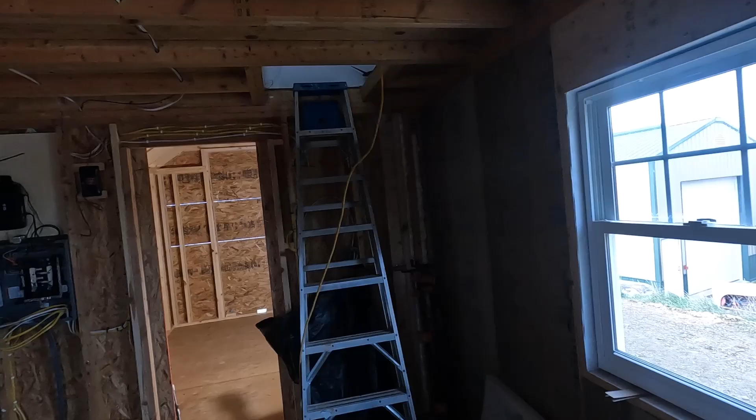The addition is completely framed in and skinned. Now it's time to get that dried in. Looking really nice, but a lot of work still left to do.

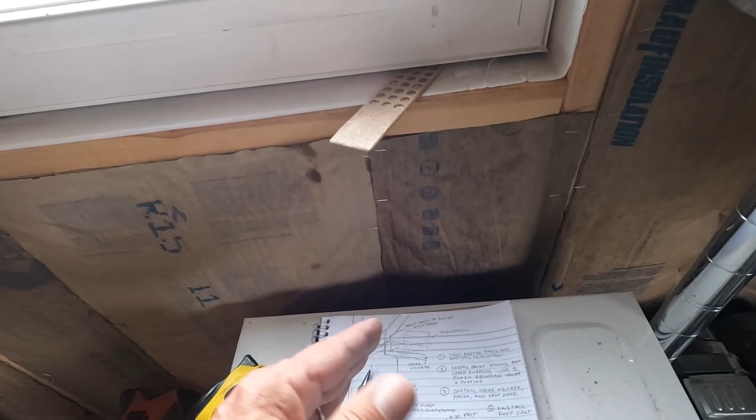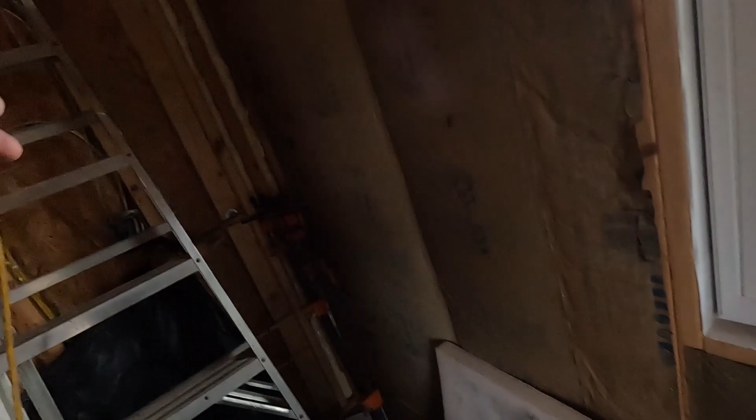I have a list, and I'm sure this is not all inclusive, but I'm trying to get everything figured out, what has to be done before what, because it's real important where the one roof meets the side of the old building, right in here somewhere.

So the first thing on here is to trim the rafter tails and install the insulation. That's cutting off the bottom of the rafter tails so they're flat, and then I'll be putting in this 2x4 all the way across, and then a fascia board on there at some point.

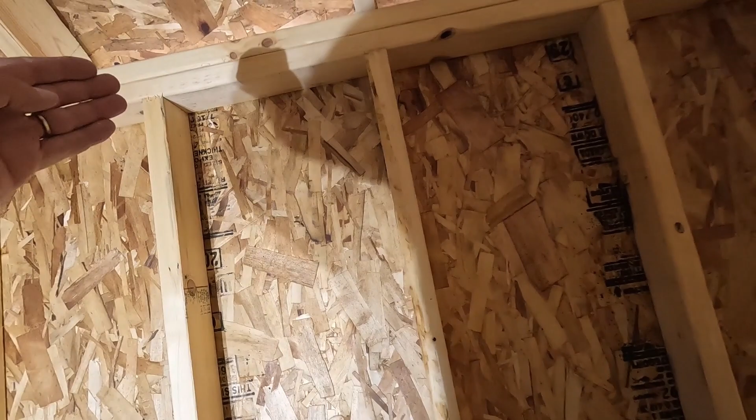But before that fascia board is put on, I'll be putting on insulation. I could show you that real quick. That'll just be a piece of insulation on the outside that goes from right in here somewhere up to the roof, and that'll seal up that opening.

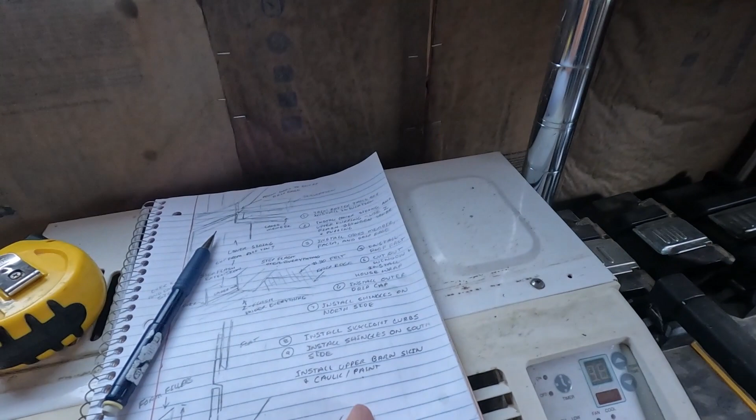This is not going to be vented. It's going to be completely sealed up, and it's going to have rock wool insulation in it. More about that later, but that's the reason for that. That's going to go like from here up.

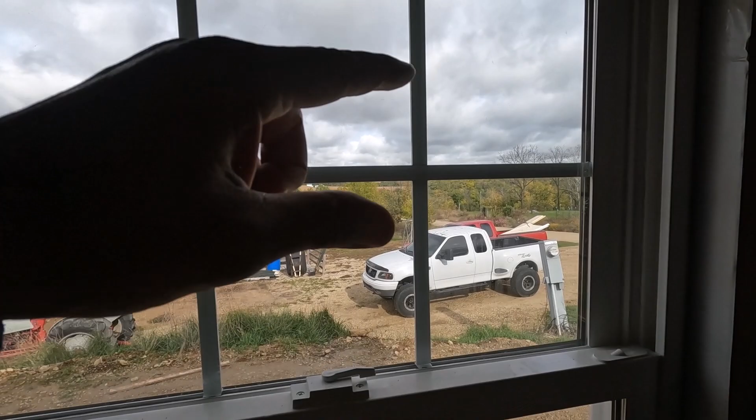So what else do we have on there? Oh, we have some special moldings that I had made up by the Amish. They're over there in the truck. And I have some furring material, which is 3/8 inch exterior plywood that needs to go on the upper section of the barn right here so that I can put the siding on that.

But before the siding goes on that, the roofing has to go on. So it's a real detailed bunch of stuff that has to be done, and it all has to be done in order. So we got our drip edge, and then on top of the drip edge goes the felt, and then on top of the felt goes the shingles and the step flashing.

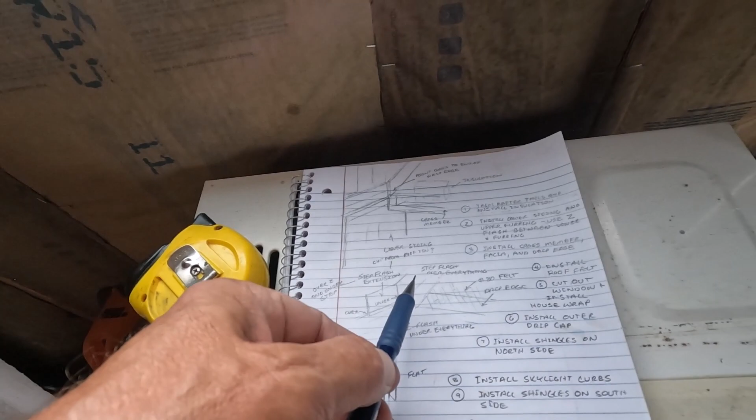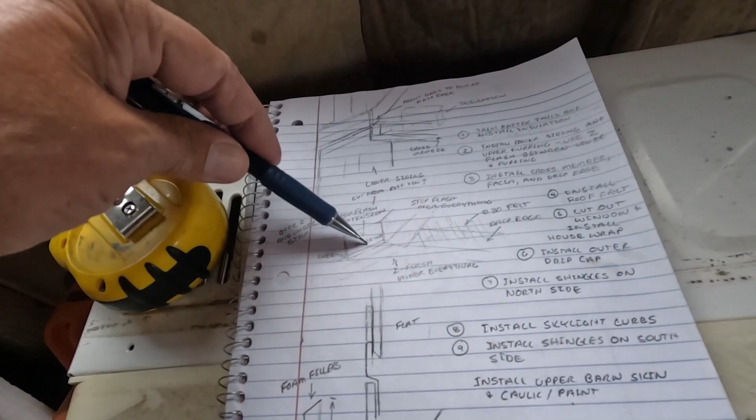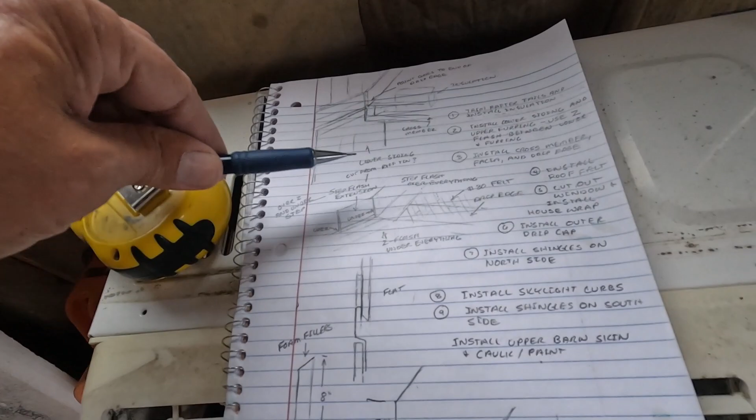And on the other side, it has step flashing along the building and around each one of the skylights. At the bottom of the step flashing, it has flashing going behind the step flashing, and it has a Z flashing that goes on top of the siding on the lower part of the barn.

Like I said, real complicated, and it's going to be kind of hard to film on this side of the building because of the wind. The wind's coming from the north, but I can film while I'm working on this side of the building. No wind over there at all, so we'll try to get as much as possible filmed.

But before I can even start on that, I need to lay out where the electric trench goes and mark how deep it needs to be along the way. Right at the pedestal, it doesn't need to have any depth at all. That whole area is going to be raised up by about 2 feet next year, and we don't want our electric line buried 4 feet in the ground.

So I got to lay that out. My daughter and her boyfriend are going to be digging that. And when I finished this up, it was getting dark, and then it started raining. So I still have all of my stuff in the gator, and I still have a truckload of stuff from running to town yesterday. All of that has to come out.

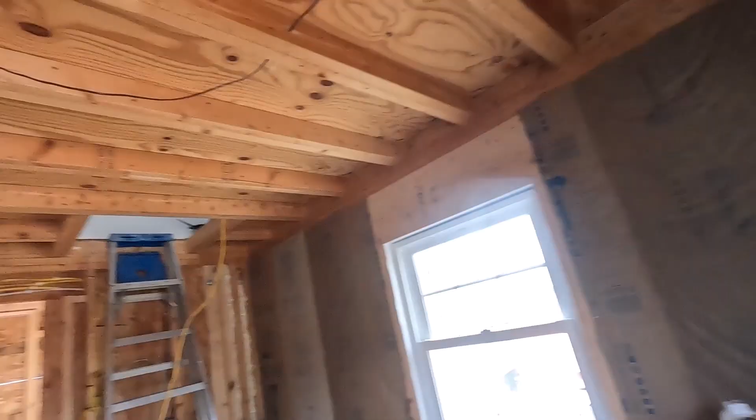So we'll see how much we can get filmed. I don't know if it's going to be that much, but I'm going to spread this out. This is day 1, and I'm guessing it's going to take 6 or 7 days to get this completely dried in. So let's get going. I'm going to mark that trench for them right away, and then we'll move over to the gator. I'll show you what we're dealing with over there. And with any luck, we'll be cutting rafter tails by noon, maybe.

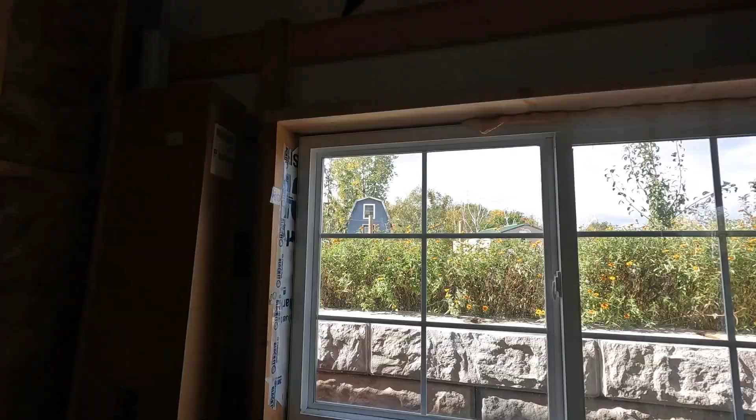Okay, I got done laying out that trench, and I'm going to try to show it to you later if this wind dies down at all, but it's like 20-mile-an-hour wind sustained out there, so I have my doubts.

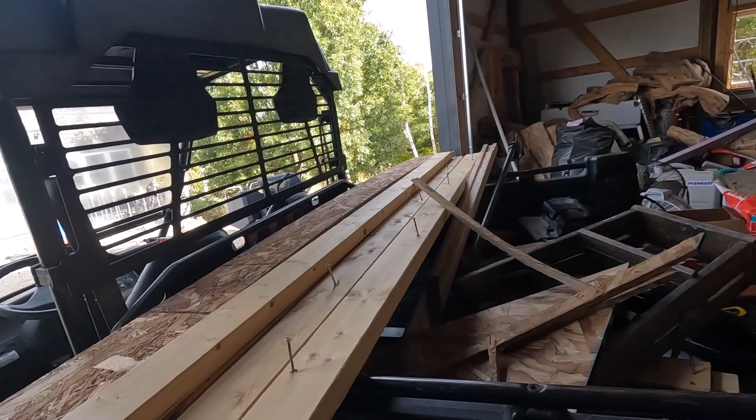All right, this is everything that was outside when I finished up sheathing the little tiny house up there, and now it needs to go wherever it needs to go.

Some of it's going here, some in the scrap pile, and some back up by the tiny house. I just threw everything in here and backed this in because it was about to start raining, and it was almost dark. That was four days ago.

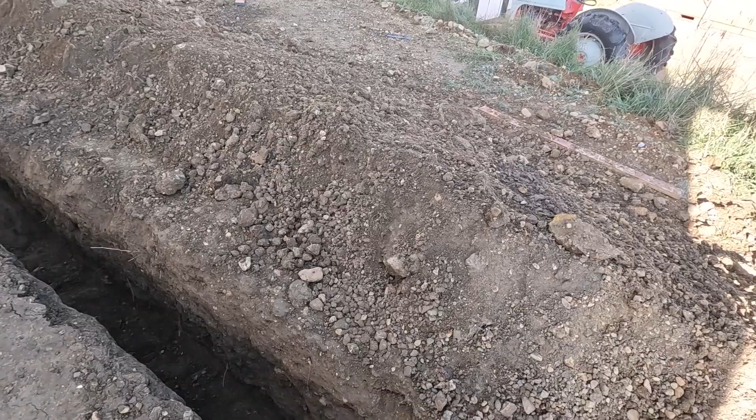Man, does that suck having a trench here again. This was all dug by hand. We really don't want a machine out here doing this, because that would just make a huge mess, a huge wide trench. But we're ready to go on this.

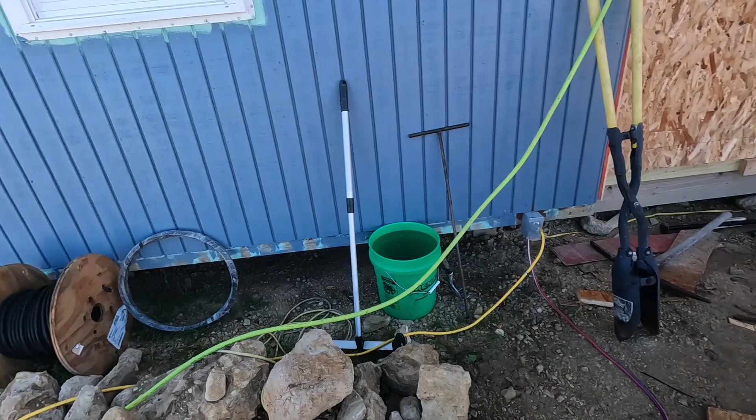We're going to be cutting and installing that wire right there and that wire right there in a day or two. But this is the focus right now.

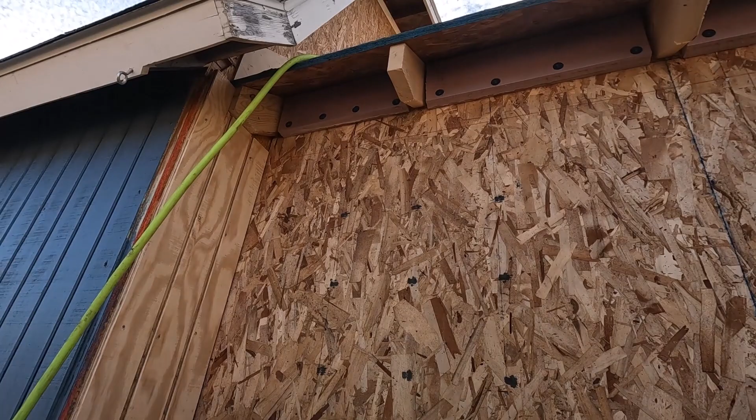The day I started this video, I got these rafter tails all cut. They had a cut going this way. Oh wait, no, I did that before. I just did the cut going that way.

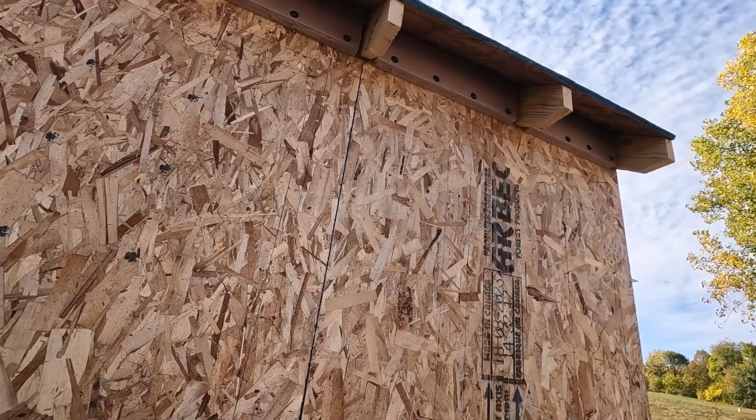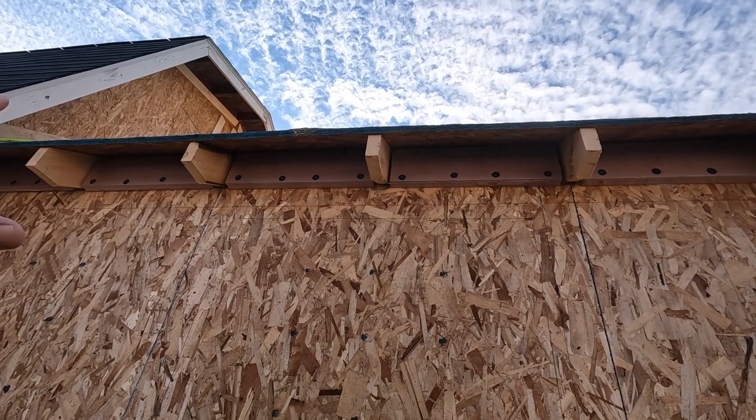Then I got all of this foam cut and nailed into place, and I was doing that while he was digging the trench here, so it was kind of a pain in the butt. It was cloudy and extremely windy that day, so I really couldn't film anything. This took that entire day, getting those rafter tails cut and getting that foam in.

Today I'm going to foam with spray foam around the edges. That's going to take a while too, because I have to move the ladder for each one. But I also need to finish that up.

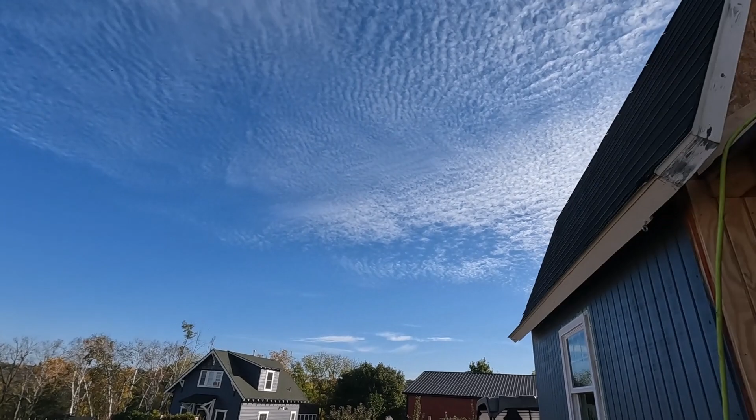I did this yesterday, and that's the furring strip. The siding is this T111. I need to template that as well today.

What I'm going to do is finish up this furring. That's going to hold the siding three-eighths of an inch away from the building so that we get proper drainage when it gets down to here. This will all kind of make sense once I get further into it and show you.

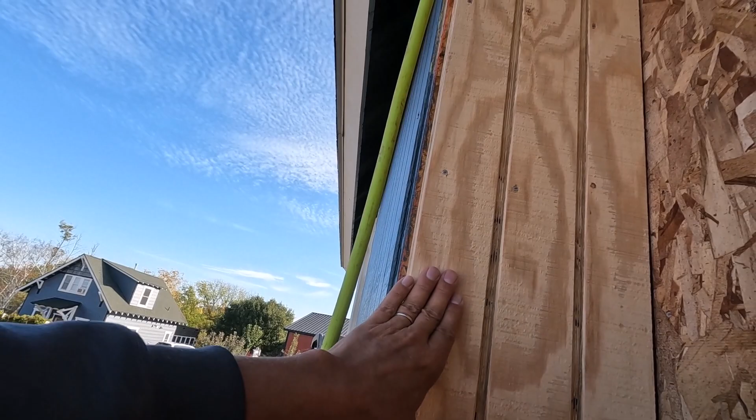There's going to be step flashing in there, another flashing that goes this way, and then a drip edge that goes this way, so water coming down the roof isn't going to go directly onto this. It's going to go onto a metal Z flashing. I got the one on the other side in, and this is the one for this side.

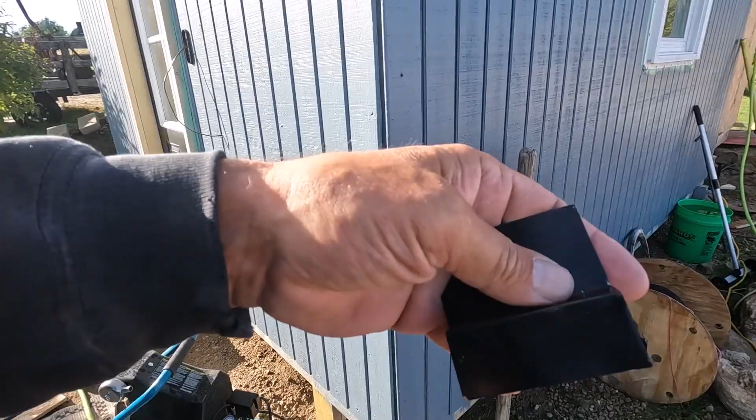So, well, it's kind of hard to explain. I'll show you that in more detail when we get to it.

Again, I don't know how much I'm going to be able to film, because it's really hard to film up there. It's hard to even be up there. But the task for right now is to get the rest of this furring in place.

Then I need to make cardboard templates of the panels for each side, which is going to take a while. I've got to cut it, tape it together, a lot of messing around, and then pull those off and bring them over to the wood shop, and we'll get that stuff cut later. Once I have those templates, I can move on to the rest of the stuff.

Let me see what I got here. I have to finish the furring, foam these, and install the cross members.

The cross members will go on the bottom of this cut here. It's a 2x4 that goes all the way across. That stiffens everything up and gives me a place to put the fascia board.

Fascia board goes on next, and there's a piece that goes onto this chalk line here that'll create the surface, or the two ends of a surface, where I'm going to put tin that goes across that, and that'll be the soffit.

So those couple things, well, especially that templating, I may only get as far as getting this furring done and getting the templates made. This stuff really doesn't need to be done right away. If I can get that upper part done, I can get some roofing felt on this. If that sounds ambitious, it really is. I don't know if I'll be able to get this stuff done today.

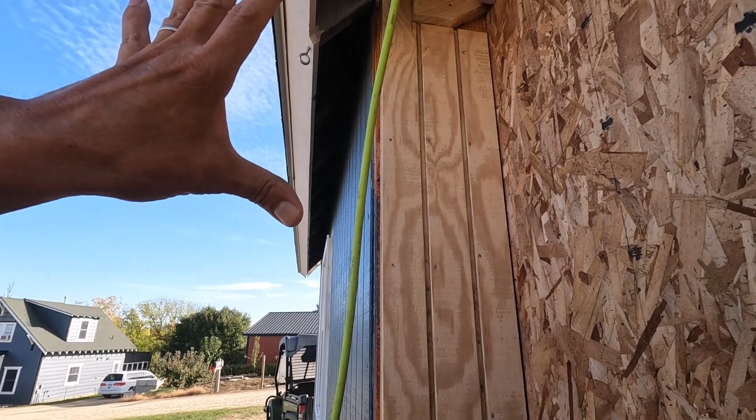Yeah, this took an entire day. The other side took about 4 hours, and the majority of the time was spent trying to figure out all the different angles and stuff. I cut a bunch of little pieces of the different materials.

I had a piece of drip edge. Where is that? Oh, it's on the other side. But I slid the drip edge down and figured out all the different angles and where stuff is going to drip. Once I got that all figured out, I cut this piece for the other side and got that in.

And then this one took about an hour. It has a beveled bottom and it's treated with a wood preservative. There were just a lot of different things that had to be done with it, but now it's done and it's going to really shed water nice. So it's better to have things nice and waterproof than rush through a job.

Okay, I'm going to get started up there. I'm going to film some of it and then I'll show you what it looks like when it's done.

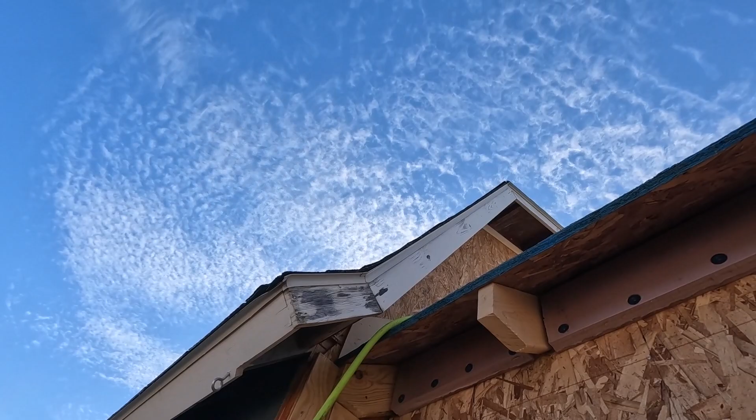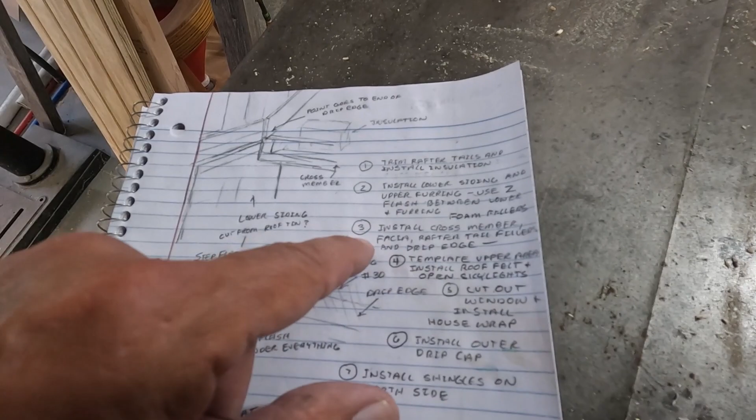Let me quick show you where we're at on the notes. These were not supposed to be days, they were just steps to get this done, but it turned out to be days. The trimming of the rafter took a full day. This took a full day. And now we're on to number 3, on the 3rd day. And this is going to take at least a full day. I have the templating in there as well, so maybe we're going to get ahead of it.

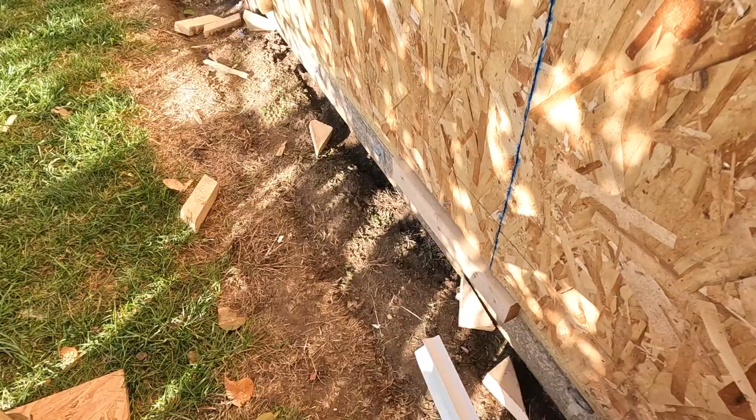Here's that drip edge sample I was talking about. Yeah, the ladder's too far away, but we have our Z flashing on this side. I'll show you that up close a little bit later, probably in the next video.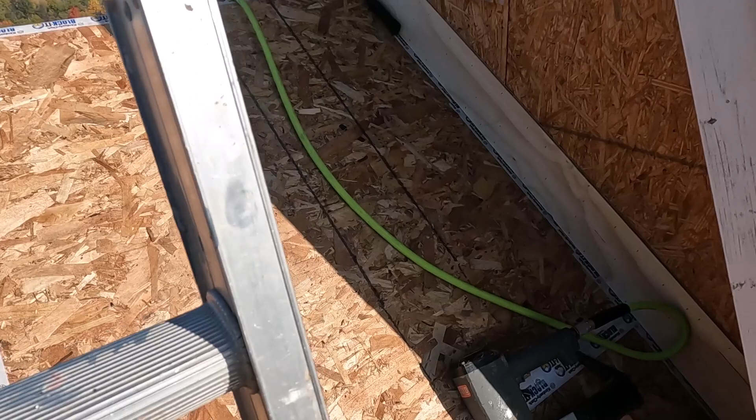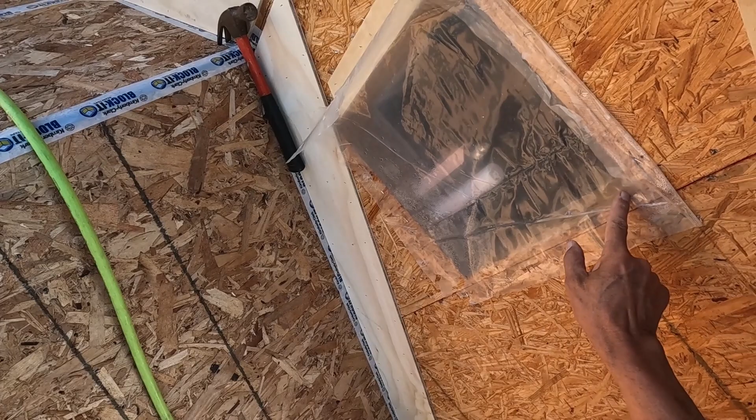All right, I just got my nailer and my jigsaw up here. So what I got to do first, I have my furring laying down there. I need to measure and rough cut a piece to fit here and then mark where the window's going to go, get that notched out, and then staple that in place. Then I'll put one across here and across there, and then we have one more over here and one along that edge, and then we can finish up that side. I think I'll actually do those edges first because they're longer.

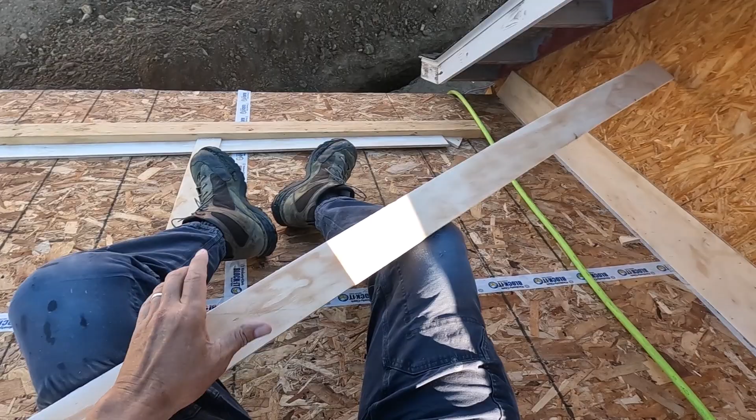This side of the roof is soaking wet from the dew, so it's really slippery. These just need to be rough cut. They're going to be completely covered.

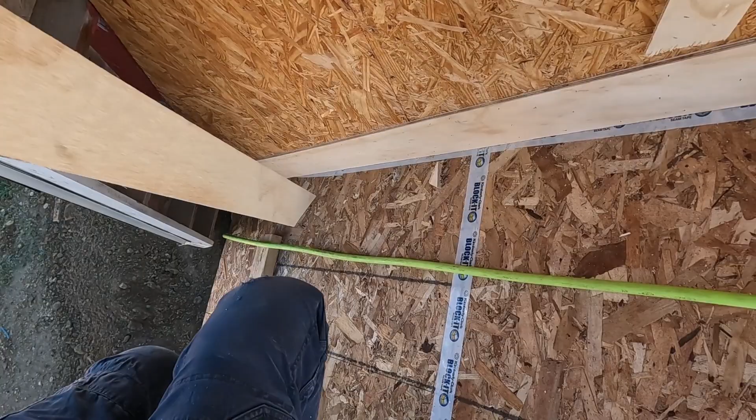Well, that was pretty good. Fits perfect the first time. And then this is just getting stapled in.

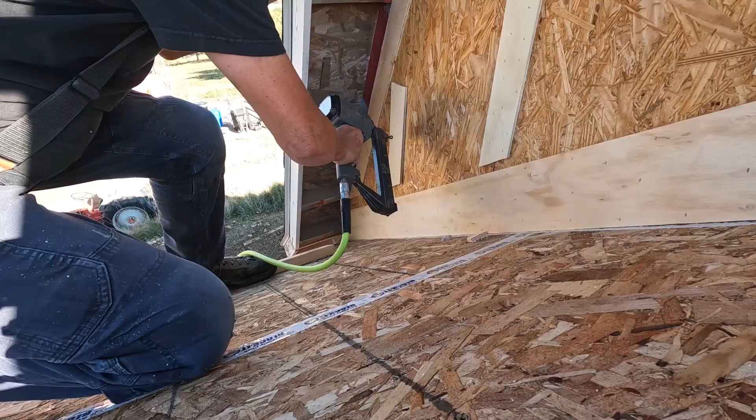What a beautiful view. Beautiful fall day. This is the first day in a good while that it hasn't been windy as all get out.

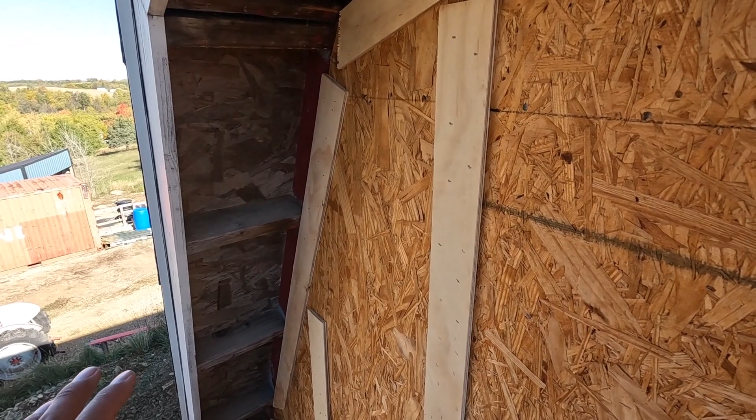Okay, now I need to go get a bunch of strips of cardboard and stuff and make a template for each side of this. I'm going to put a center line right down here based on this right here, and then I'll have to figure out the overlap, and we'll get templates made for both sides of this. Once that's done, I can concentrate on the rest of the roof, specifically the fascia, so that I can get the drip edge on. And once I have the fascia and the drip edge on, I can get the felt on here.

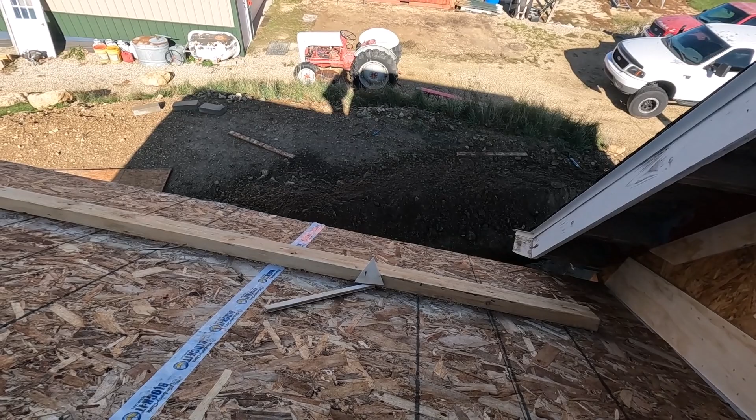That's going to run up just a bit onto this. There's going to be step flashing on that later. But before that, I have house wrap to put on here. Lots of work to do. I have the rest of today and tomorrow, and then it's going to rain again the day after that. Hopefully I can get this done by then. All right, let's start making those templates.

All right, I have a good deal of my templating done. What I did was just take a large piece and get it right in the center, put a couple staples in it, stapling it right to the furring strips here. Then I used about 6-inch wide strips and this bigger piece right here to fill in the rest.

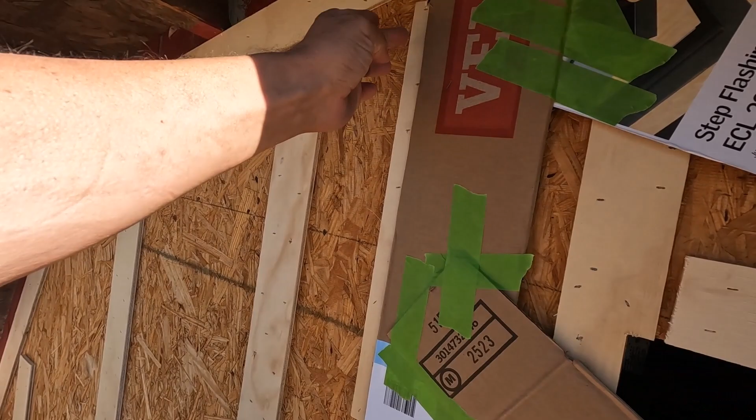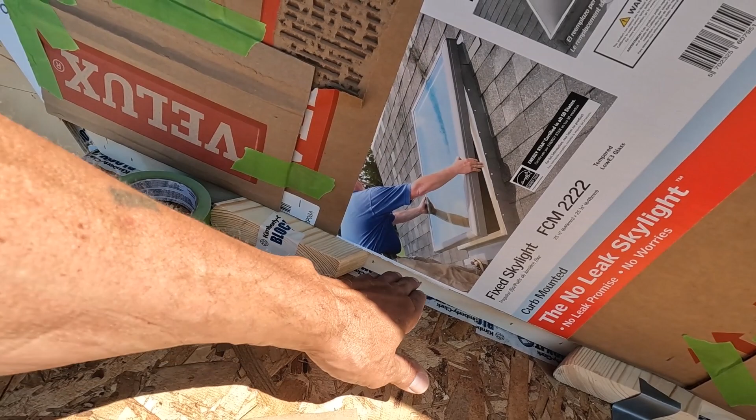This is my edge right here, and I have these 2x4 spacers at the bottom. I want 1.5 inches of space between the bottom of the panel and the roof. That's going to get filled in with a little bit of stuff, the roofing, the felt, and the step flashing. So it'll probably end up to be like 1.25 inches, which is fine.

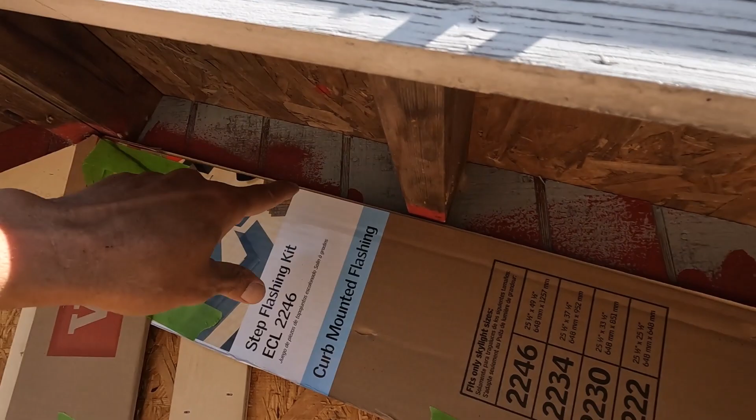So I have almost all of this upper part done. I got about 1/4 inch of gap here and there, 1.5 inches at the bottom, and I'm going to fill in this opening right here. I don't need to, but I want to do that so that this whole thing doesn't fall apart when I take it off.

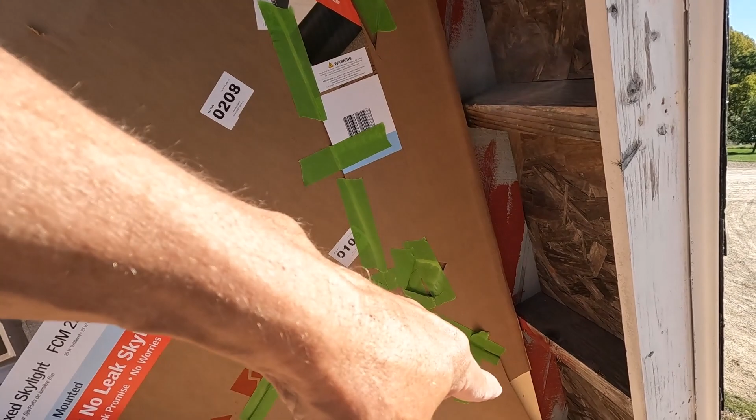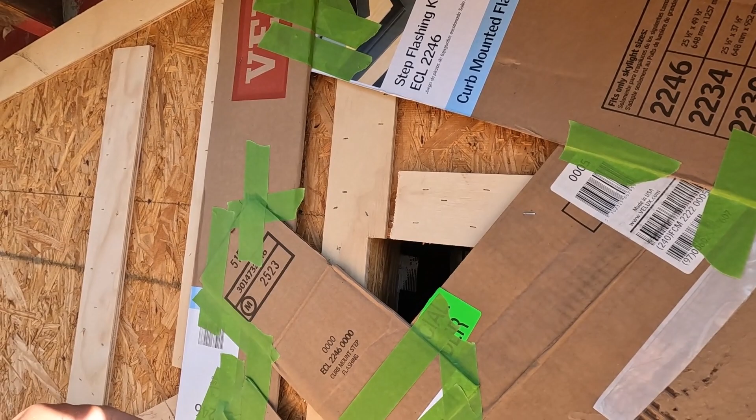We got a couple staples holding this on, as few as possible. Got one there, and there's one buried under here. Once I get that lower part done, I have to peel this off, and it has to come off intact. So I'm going to get a piece in here, put a bunch of tape on that, and all that's going to do is hold this thing together when I take it off. I could take it off exactly like it is if I could get it off, and it would be fine. I don't need anything in here, but I'm just going to add it for extra strength.

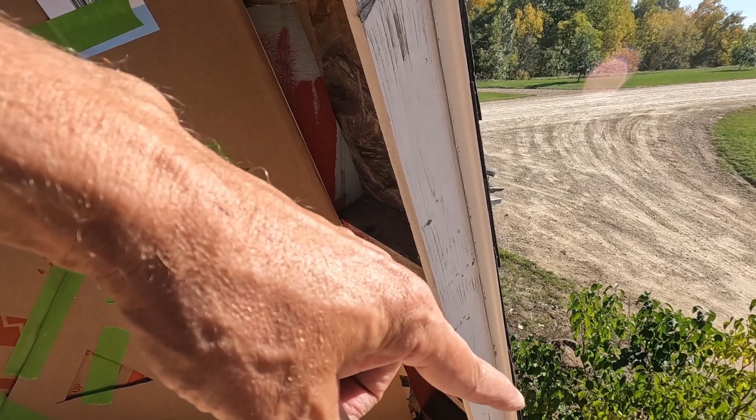Once this is done, I'm going to get down on top of a step ladder and piece together all this stuff. That's probably going to be 3-4 pieces. Then I'll come back up here and pull this off, and I'll start the next piece, which goes to about right here. I got the lines drawn on here.

As you can see, I believe you can see that. That represents the overlap of the panels. All right, yeah, this is taking a while, like I thought. So I'm going to get moving on this, and I'll get back with you when I start tearing this off.

Okay, we have the north template done. Let me show you this lower part here. This is exactly how it's going to be cut.

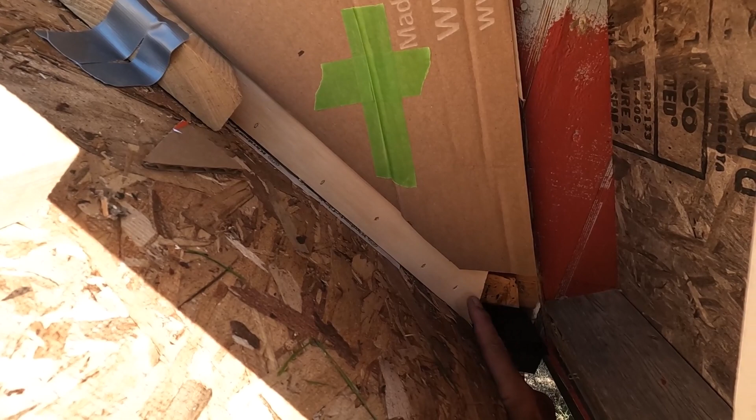There's actually another piece of this furring that goes in here, and then when the roofing goes on, we'll have a drip edge come out to about here, but there's step flashing that will come way back to here, and that'll be under the final siding. So this will all be black right here, and this will be the same blue as the rest of the building.

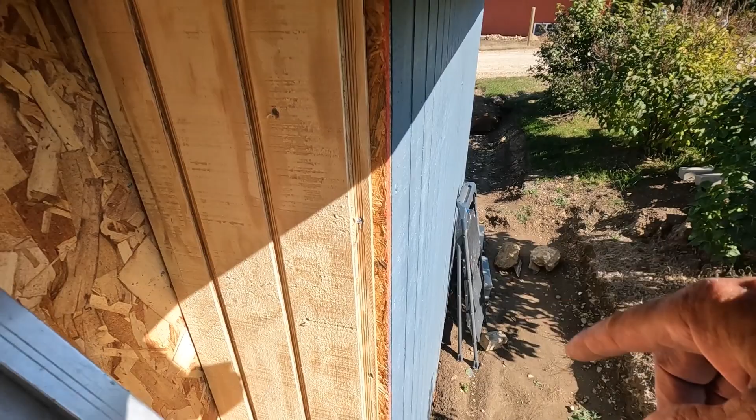Now I got to get this off without destroying it, which shouldn't be too hard. I probably have 5 staples in there. Got one right here. Yeah, there's only 3 on the bottom, 5 or 6.

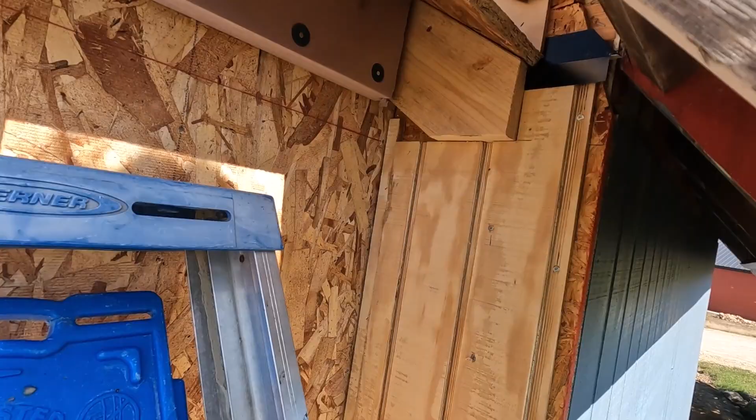But before I do that, now that I got some heat on this, I'm gonna go around and get this foamed in right away. Now that I got the ladder out of here, I have to move the ladder and go down the line, get that all foamed, and I'll do the same thing on the other side once that warms up.

Not sure if you'll be able to see that or not, but I got everything all foamed up. Now it's time to take the template off. Hopefully this thing comes off easy. That will make my day a whole lot easier. Oh, so far so good. Yes, yes, yes.

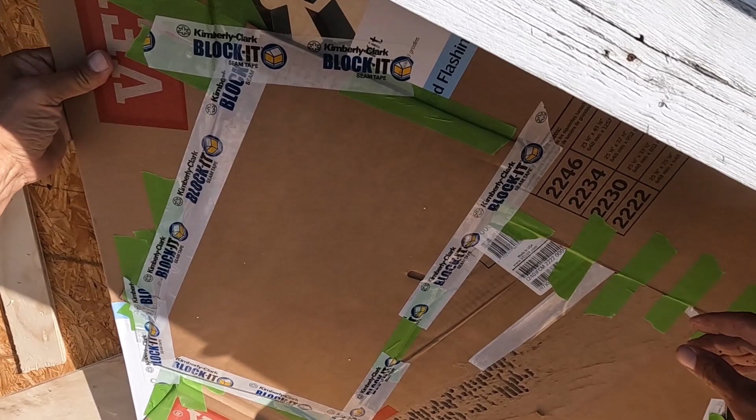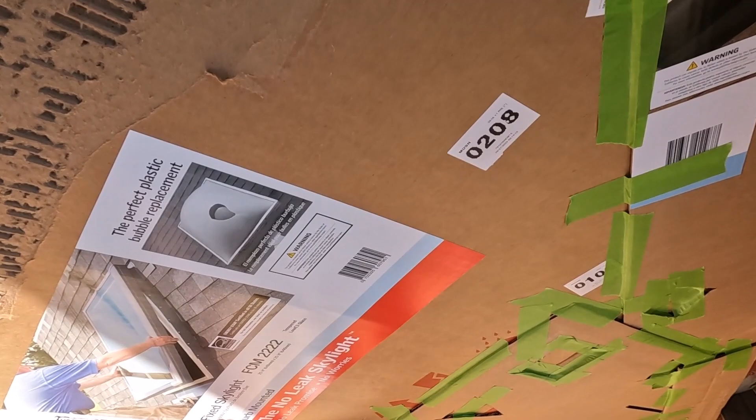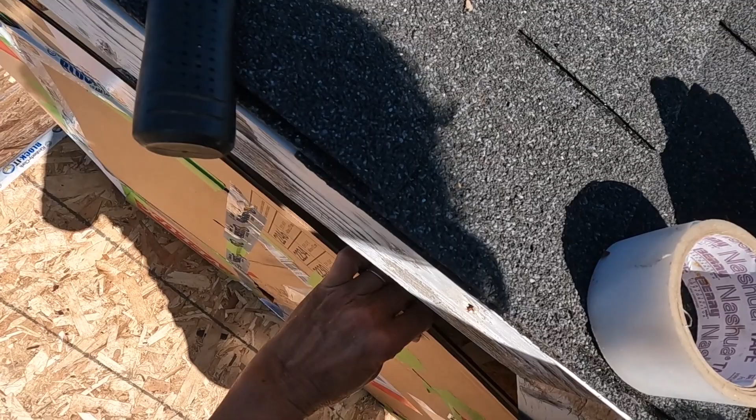Don't want it to bend up much, and I definitely don't want it to come apart. Come on. There it is. Okay. Now, to get this down, I can't just drop it. Beautiful.

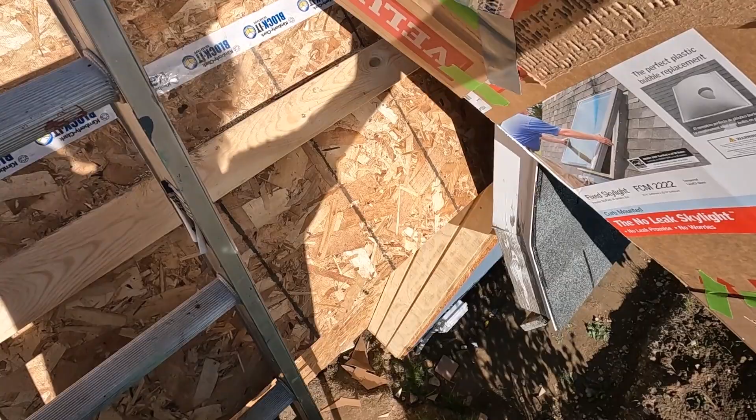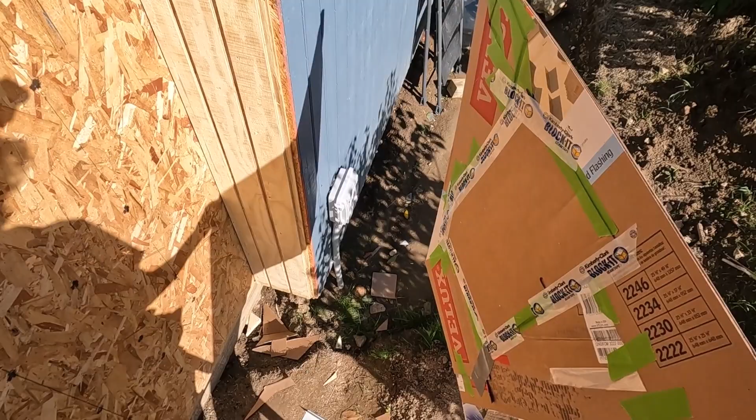A hornet attack, several hornets attacking me. Sons of bitches.

Okay, I moved everything over to this side. Yeah, I don't know how far I'm going to be able to get today. It's already 1 o'clock and I have one side of the template done. Well, all of this foaming as well.

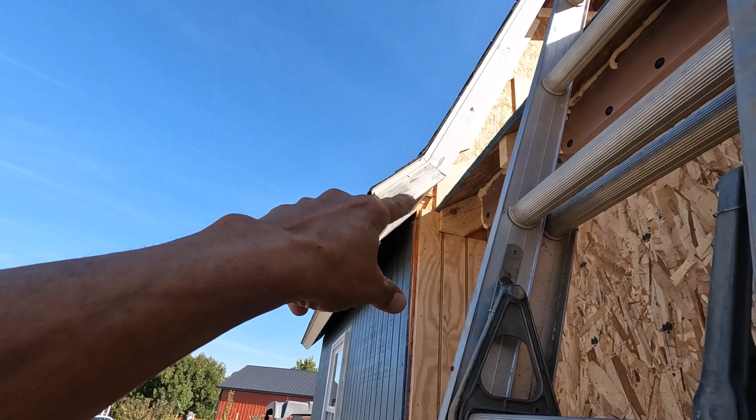But that template is far more important. Hopefully I can get this other side completely done by the end of today. And with any luck, get these filler pieces in the corners and that trim. And I'm sure that's going to be it. Either tonight or tomorrow night, I have to run to town. I have some scaffolding that screws onto the wall so I can put the roof on from up high. I usually do it from a ladder, but that just takes way too long.

With any luck, I should be able to get what I said done today, but I'm definitely not going to be able to get these filler pieces and the fascia on today, which has to be done before the drip edge goes on. Once the drip edge and the felt goes on, I have to get the house wrap on before the other drip edge can go on.

Then I can put the roof on. Looks like this is going to get rained on again, but I think it's just going to be a brief little rain - not tomorrow morning, but the morning after that, which really sucks. All right, I'll get back with you once I have this part templated.

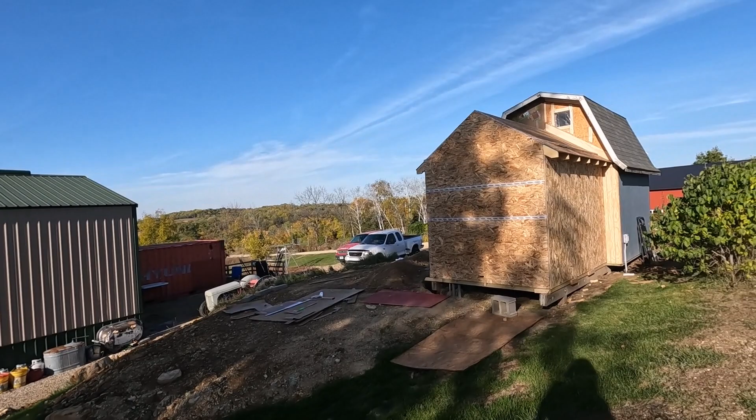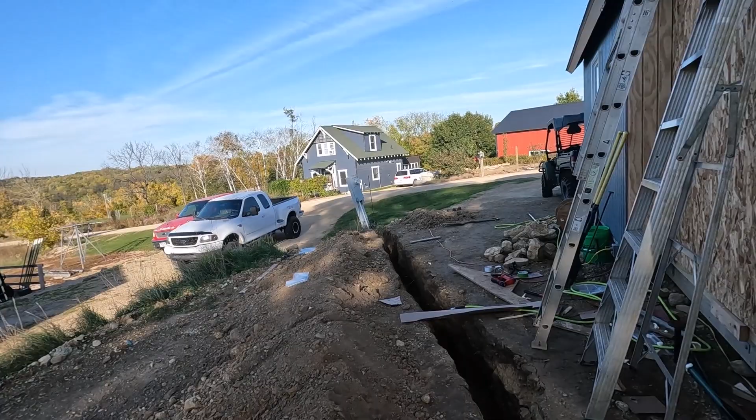All right, my other template is done. We just got invaded by Asian beetles, and my wife sprayed the house. I sprayed up here and some of the doors. But there's just thousands of beetles around. A lot of these are dead now, but you get more landing all the time. Not sure if you'll be able to see them. There was hundreds on here before, and then I sprayed this - they all dropped down to the ground.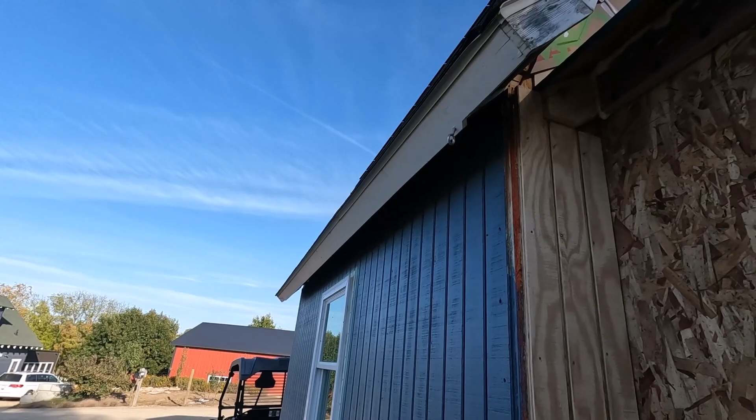All right, I'm gonna go pull that template off, and then I have to hand nail these little pieces in the corners. And then I'm going to start getting dimensions for this fascia stuff and some fillers on the end. Not sure how much of that I'll be able to get done, but looks like I'll be able to get some of it done.

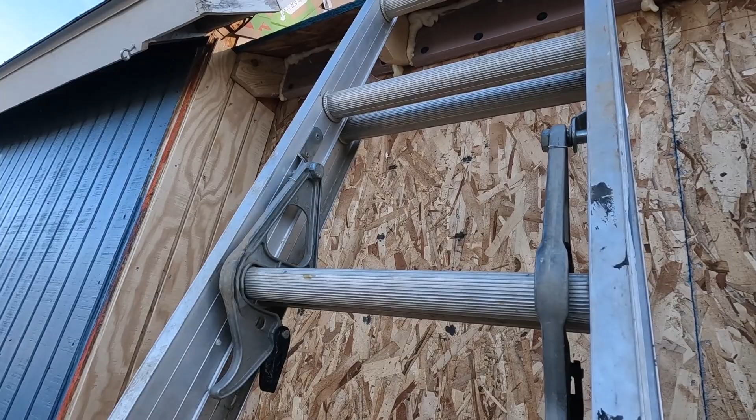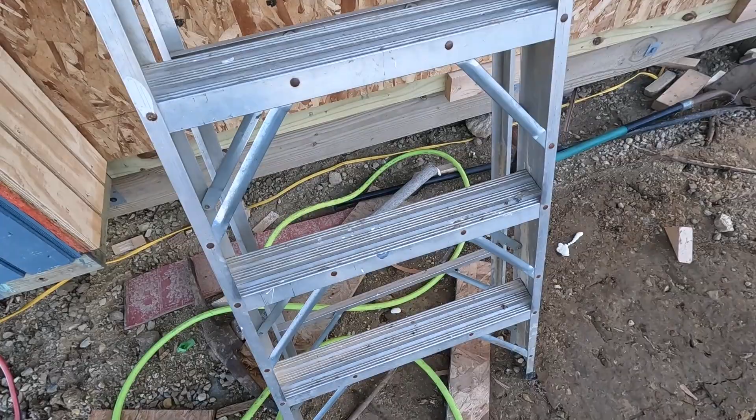Okay, we have 4:33. It is quitting time, but I have another one of these to do on the other side. The other side already has the tin in there, the black tin.

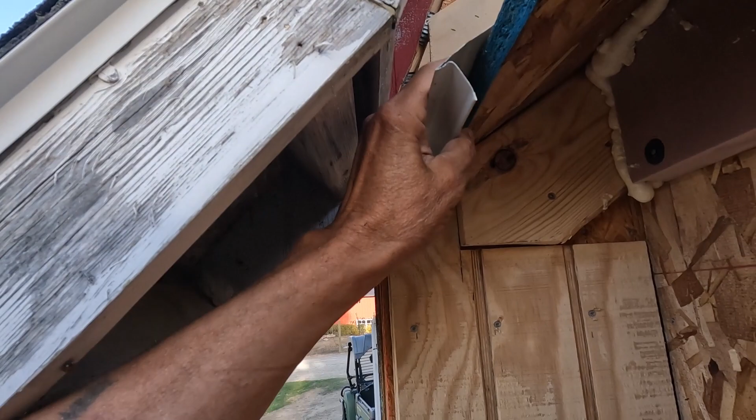Kind of show you what's going on here. When I install this drip edge tomorrow, I'll be installing the fascia board, which will be out to about here. And then the drip edge will be kind of like that. It's hard to see, but the drip edge will be past the metal like that, and this whole area up here is going to be covered in metal.

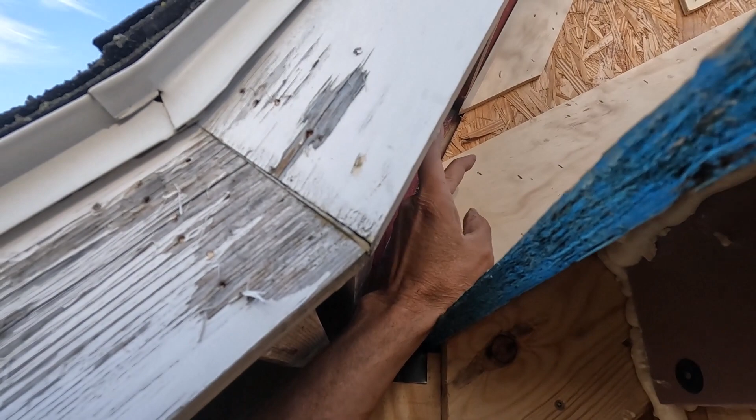The step flashing goes up 5 inches. This is 6 inches, so the step flashing goes up to here. Step flashing is going to go way out to here, so there's no way water can get in here.

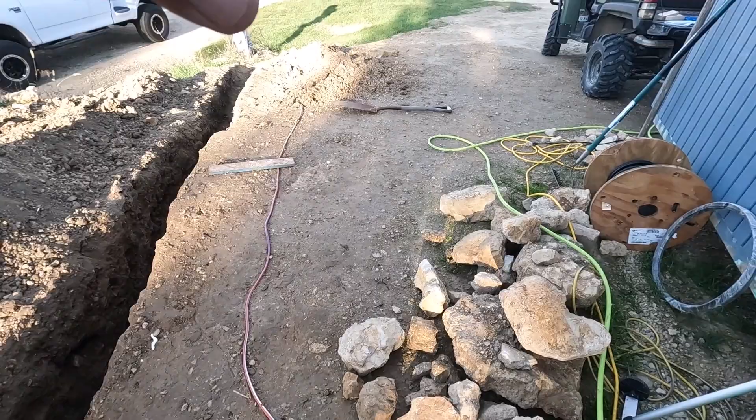I also need to get this done. I gotta cut this wire into 3 pieces, get it taped together, and that fourth one there, get it taped together, run it through the ditch, and get this backfilled so I got some flat area to work again. I really hate these trenches, but it is what it is.

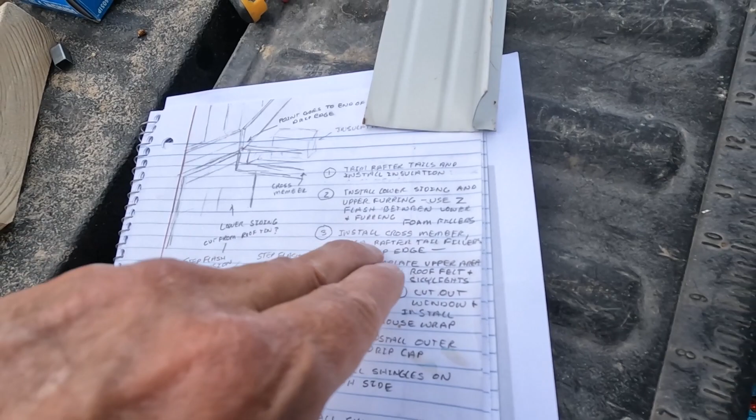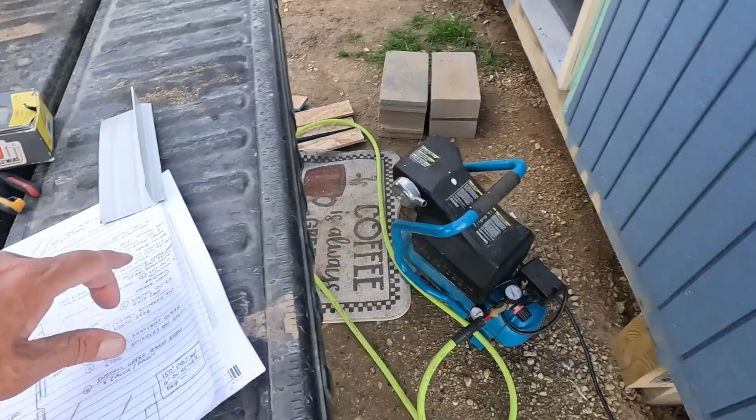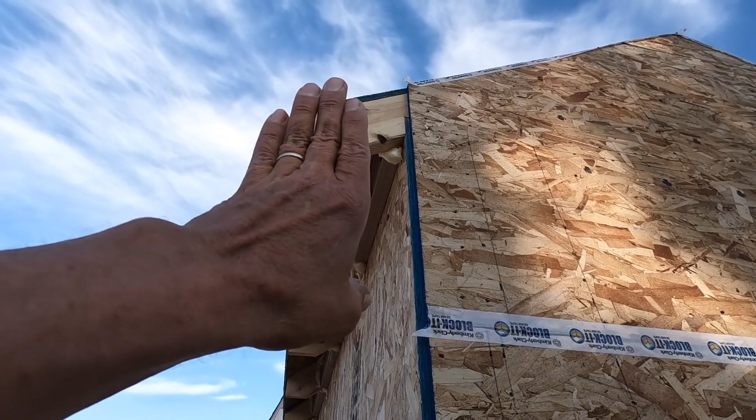All right, back to the punch list. Today I got the template done for the upper area, which is number 4. I still have some of 3 to do - install the cross members and the fascia and the rafter tail fillers and the drip edge. All of that has to be done, but the majority of it's going to be done tomorrow. The filler is just a piece of OSB that needs to go on the face of this so it's at the right thickness. And then the cross members are going to go flush with the end here and go under all of the rafter tails there.

That's relatively easy. I got to make up a couple dead men to hold it up there, but other than that, it's not too hard. So I know I'll get number 3 done tomorrow, and I don't know about the roof felt - we'll see on that. So yeah, tomorrow is going to be another busy day.

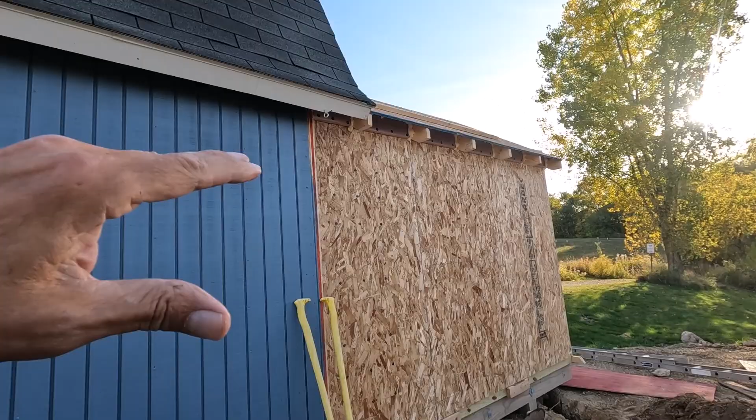They took the rain out of the forecast. If that holds, that's going to be great, because hopefully I'll get them scaffold brackets tonight and I could start getting that roof felt on and getting that shingled. The other side is another story - I got 2 skylights in that, so there's step flashing at the wall here and step flashing all the way around both of the skylights. That is going to be pretty darn interesting.